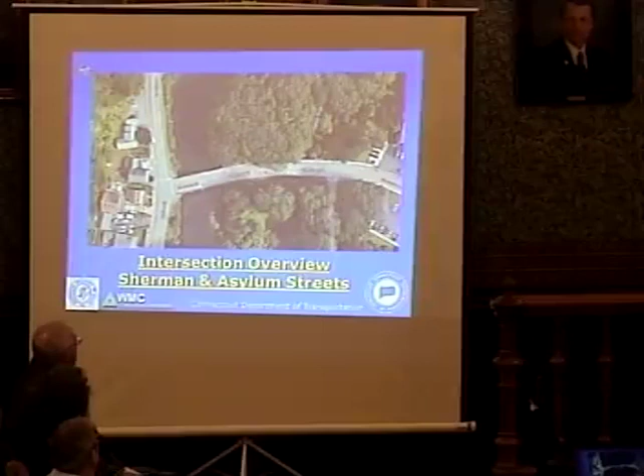So there's a couple other call-outs there - the Upper Falls Mill Dam, just so you can kind of get an idea where you are. It's a blow-up of the intersection. So we're really looking at these two bridges as a project and the associated roadway work.

Reasons for the project: the westernmost bridge, or Bridge 04047, was constructed in 1955. Later on, there was some reconstruction work in 1988. The superstructure condition was rated a poor condition, which is rated a 4. The substructure condition, which was a 6, is a satisfactory condition.

Bridge 03797, the Eastern Bridge, was constructed in 1920. It was reconstructed and widened in 1964, and there's been some recent repairs in 2017. The superstructure for that bridge is rated 3, or in serious condition. The substructure condition is 4, which is also poor condition. In 2017, the city did some superstructure repairs to that bridge.

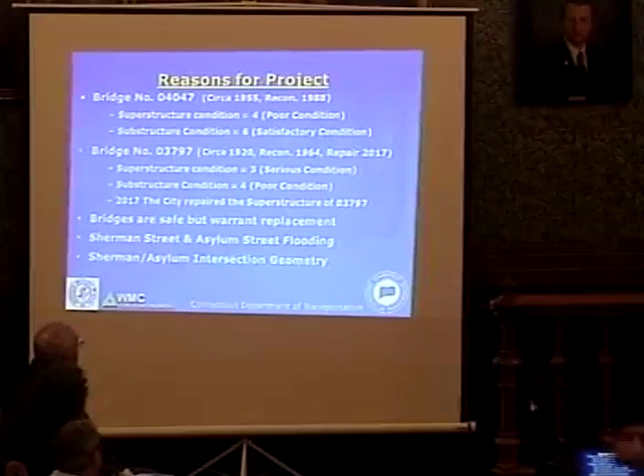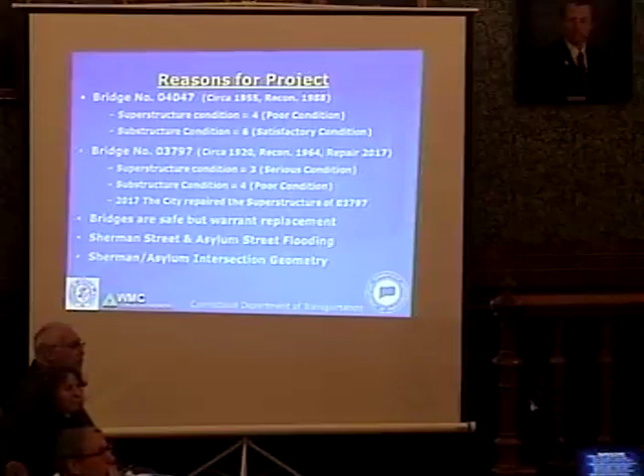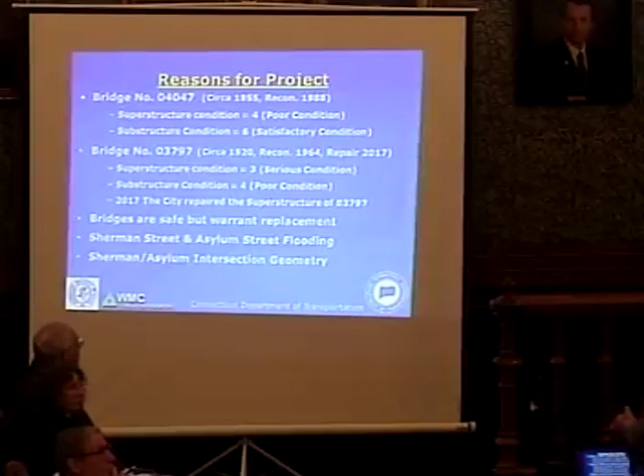Now, the numbers there - serious condition, poor condition - these are DOT ratings that they go through every 2 years. They inspect these bridges, so currently the bridges are still in a 2-year inspection cycle. As the bridges get worse, as those numbers go down, they get inspected 1 year, 6 months, so on and so forth. Currently they're still safe, but they will warrant replacement. So another reason for the project is we're really trying to reduce the flooding on Sherman and Asylum Street.

We're going to square off the Sherman and Asylum Street intersection geometry.

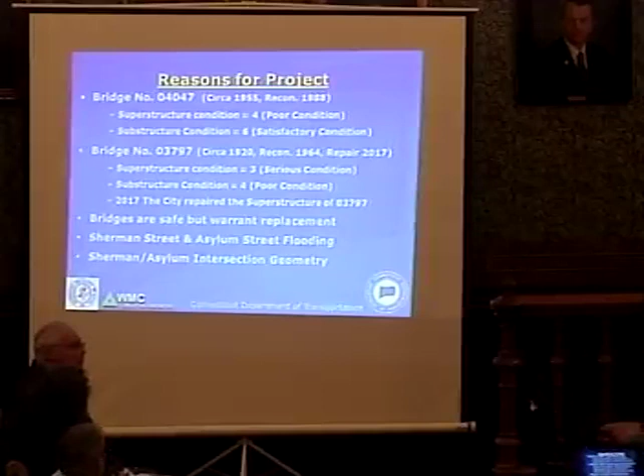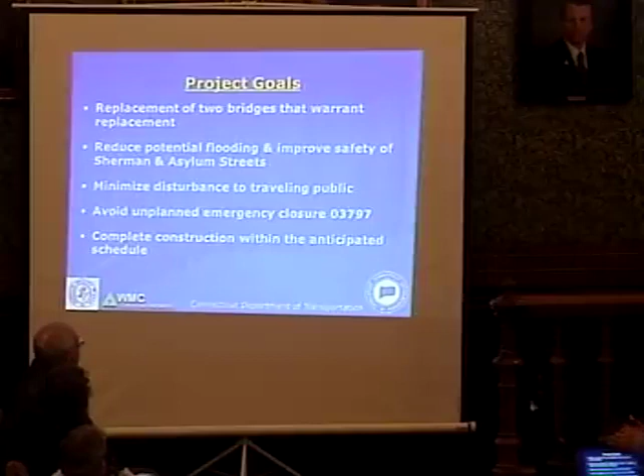Some of our project goals: replacement of the two bridges that warrant replacement, reducing potential flooding and improving safety at Sherman and Asylum Streets, minimizing disturbance to the traveling public, avoiding unplanned emergency closure of 03797, and completing construction within our anticipated schedule.

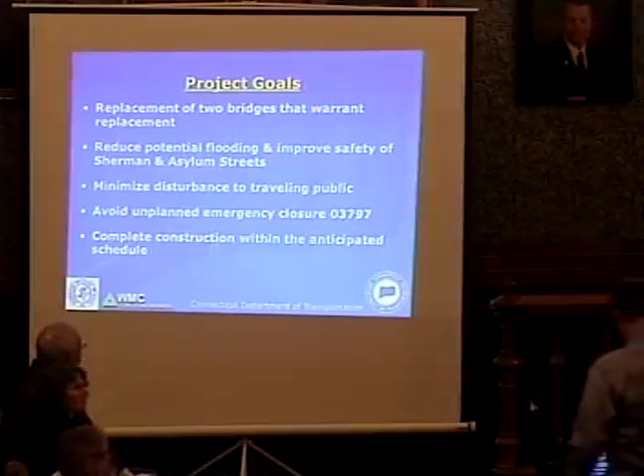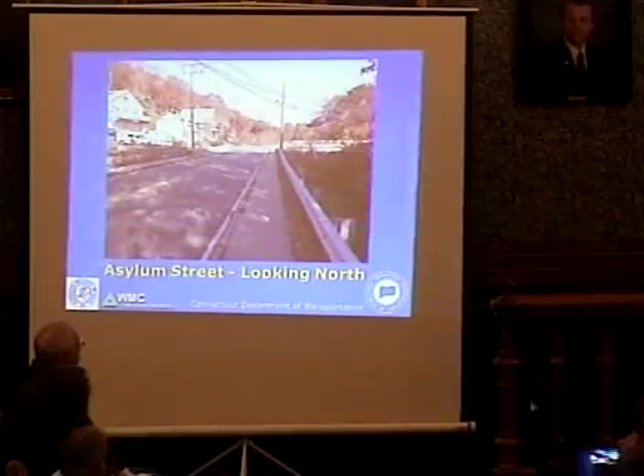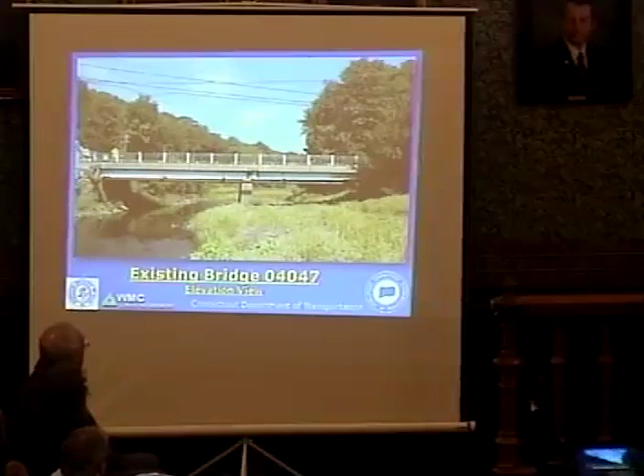Our overall project plan covers both projects on Sherman and Asylum Street, which is highlighted there in yellow. We're going to do a roadway reconstruction of about 1,030 feet, and we're going to be replacing both the eastern and western bridges.

The orange are actual structures. The green are areas where we're going to be filling in. And the light browny orange is actually areas we're going to be cutting.

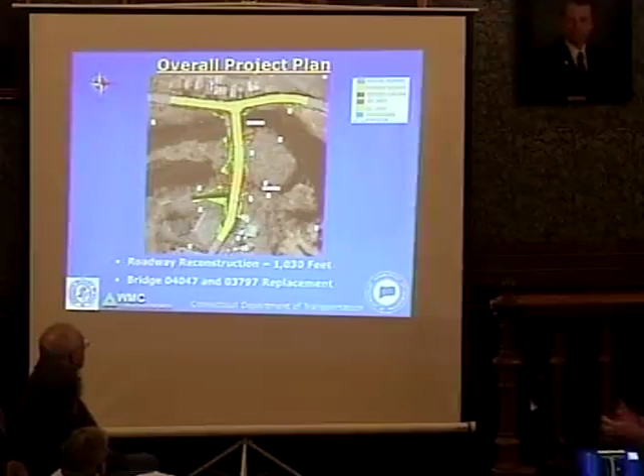On Asylum Street, there's approximately 525 feet of roadway reconstruction. We plan to raise the profile at the intersection by about 18 inches, at the intersection of Asylum and Sherman Street, and then taper down and connect into the existing roadway.

That raise in profile requires us to install a retaining wall along Asylum Street, or we're going to be filling in the river, and we don't want to fill in the river. We want to keep it open so the water can flow through.

Part of this project, we're going to be relocating all the utilities and the drainage on that road. There's a lot of utilities, very close to the existing bridge, and in order for us to get in there and construct the bridge, we'll need to relocate them.

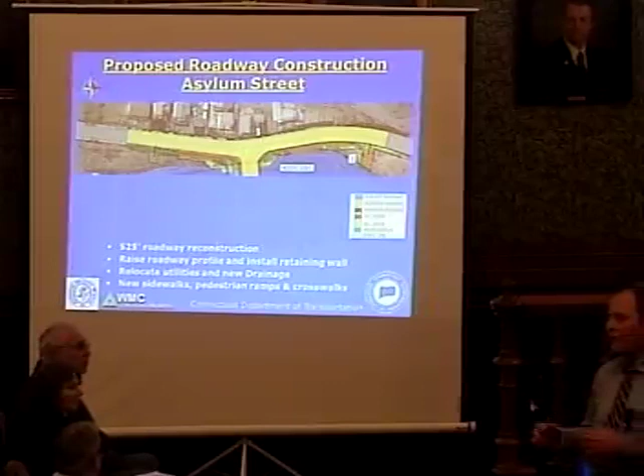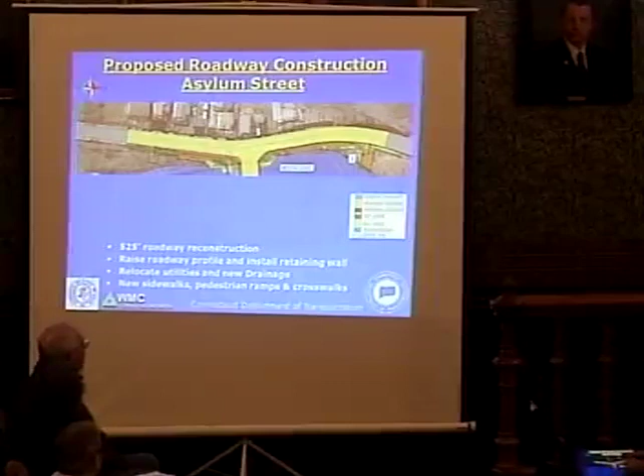So we're going to try to push them more to the west, to that western sidewalk, so the contractor can work on the bridge abutments and the retaining wall with less in the way. We're also going to be putting new sidewalks in, new pedestrian ramps, and new crosswalks as part of that project.

On Sherman Street, we're going to realign it slightly to the north. You can see to the left of the screen that little gray area, which is the existing bridge. We're going to square it, pretty much make a 90-degree intersection instead of having that skewed, hard right turn from Sherman Street that's very skewed.

We're going to be raising that profile to help reduce flooding. As that green area shows, those are the areas we're going to be filling in, so as we raise that profile, we'll have to grade out existing earth to make up for that difference. We're also going to be relocating and installing new drainage on Sherman Street, along with new sidewalks, pedestrian ramps, and crosswalks.

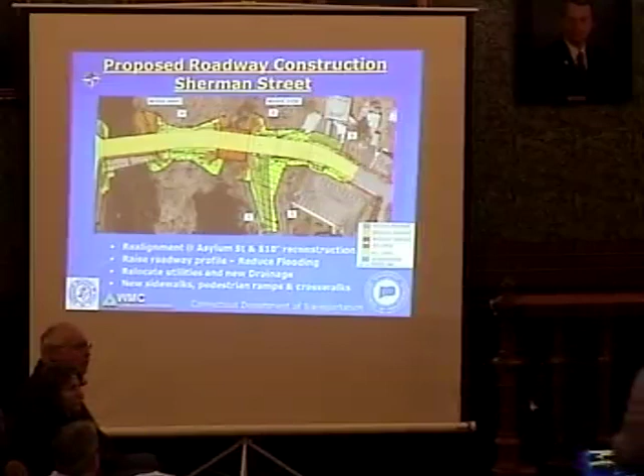Currently, the existing sidewalk is on the north side of the bridge, and then you come across Sherman Street to Asylum Street and have to cross the road. We're proposing to extend that sidewalk on the southern side past the park entrance down the southern side of the bridge and connect it to the sidewalk on Asylum Street.

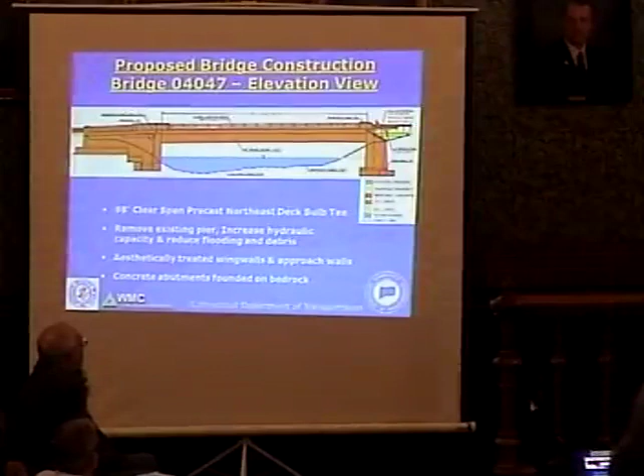This is an elevation view, similar to the picture, but this is a colored up view. We're going to install a 98-foot clear span with a precast northeast deck bulb tee, and remove the existing pier to increase the hydraulic capacity and reduce flooding and debris.

Our wing walls are all going to be aesthetically treated with a concrete form liner. At this time, the city is discussing using a natural stone-looking form liner, which mimics the look of real stacked stone. The concrete abutments will be founded on bedrock.

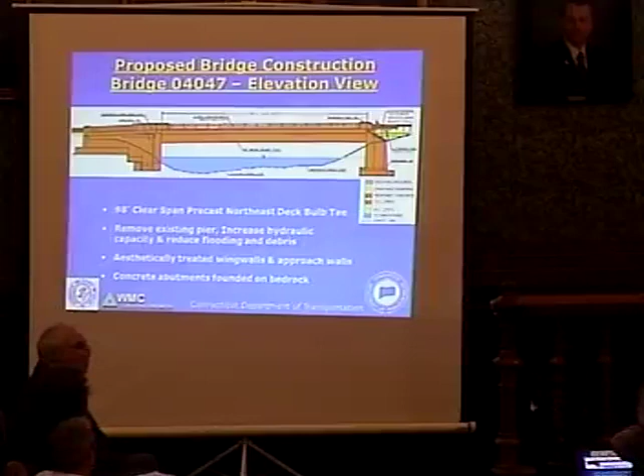Those beams that I was telling you about, the top portion of the beams are much wider than the lower portion. That kind of speeds up our construction time. We're able to install those, connect them together, and directly pave right on top of it, trying to keep this construction moving fast.

So we're going to widen the bridge. It's going to consist of two 12-foot travel lanes, two 4-foot shoulders, and a 5-foot concrete sidewalk.

Utilities are going to be relocated on the bridge. We're going to install a sewer pump station, pumping the sewer across the bridge so it's not hanging down below in the flood waters. We're going to tuck it up inside the bridge structure. We're also going to install a new water main and gas main on that structure, and install a new bridge rail on the bridge as well.

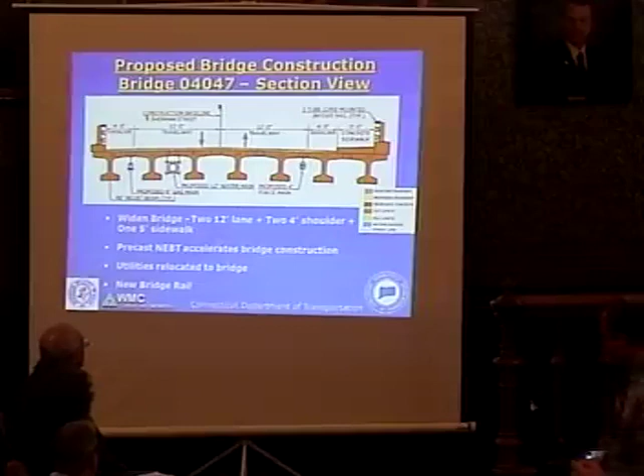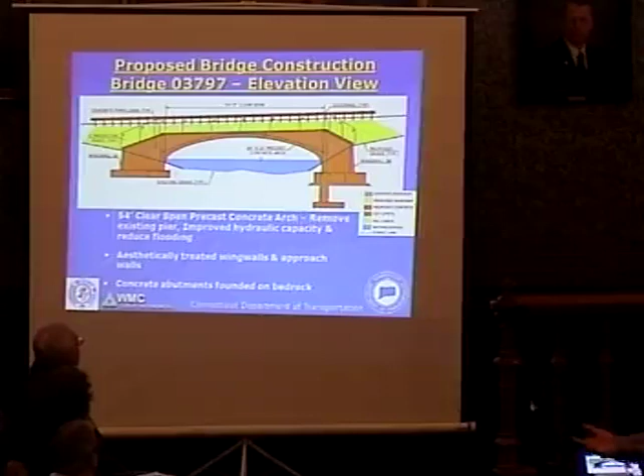The Eastern Bridge - this is an elevation view of the Eastern Bridge. This bridge, we're planning to do a 54-foot clear span precast concrete arch. We're going to remove the existing pier so we can improve the hydraulic capacity and reduce flooding. We also are going to treat this bridge with that form liner that I mentioned on the previous slide.

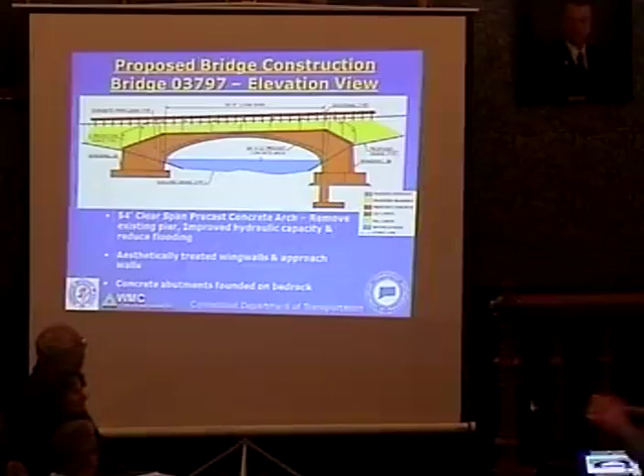Both the concrete abutments will be founded on bedrock. This bridge will have MBR guide rail because we're making this bridge a little longer than the other bridges, and we're going to slope the earth out on the side. So we're going to have a typical guide rail you'll see driving along the road. We're going to cross that bridge, and there'll be no bridge rail on this.

The cross section is very similar to the other one, but we're going to have the 12-foot travelway, the 4-foot shoulder, the 5-foot sidewalk, and then we're going to have the guide rail, and then we're going to slope down to the end of the culvert.

The bridge will be about 60 feet in length. We're going to relocate the utilities inside the earth above the box or arch culvert and below the pavement. So in that green area is where the utilities will pass through.

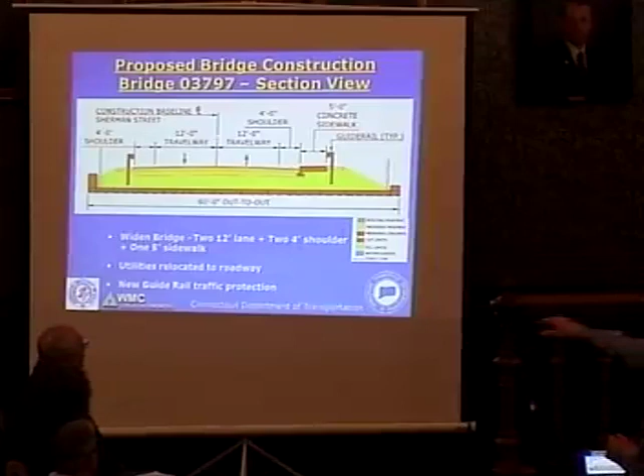This project is planned to be staged over 2 separate seasons. Our first season, we'd like to relocate the utilities in Asylum Street. Like I mentioned before, there's a lot of utilities out there, and we want to do the work we need to do to get them out of the way.

Also that first year, we want to install the easternmost bridge, the 03797, with that precast arch, and we want to complete portions of Sherman Street Roadway to allow traffic to be open to the public as soon as we complete the Eastern Bridge.

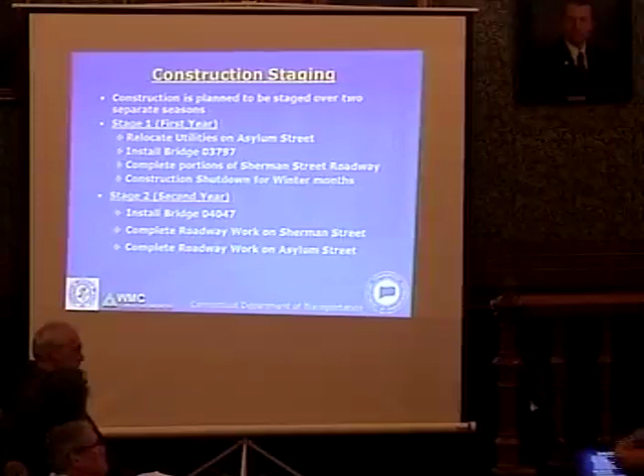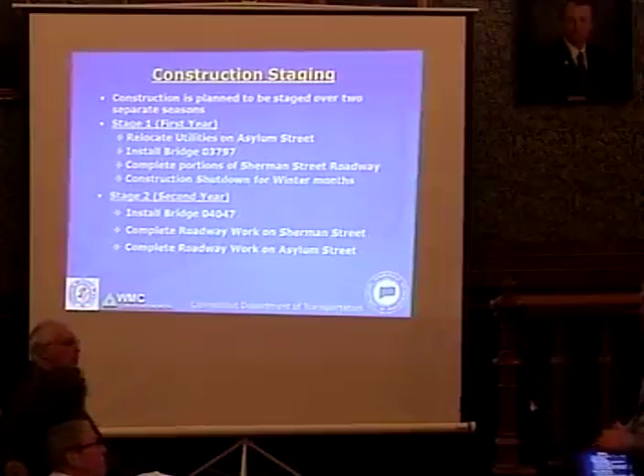Then after winter comes, we're going to shut down for the winter, open up everything, and then come back in the spring in our second year. That year, we plan to install the Western Bridge, 04047, complete all the work on Sherman Street, and then complete all the roadway work on Asylum.

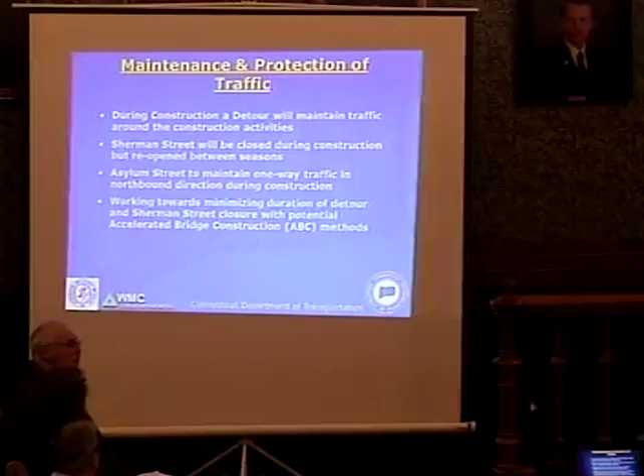Maintenance and protection of traffic: during construction, there will be a detour to maintain traffic around the construction activities. Sherman Street will be closed during construction, but reopened between the seasons. Asylum Street, we would like to maintain one-way traffic in the northbound direction during construction. We're working towards minimizing the duration of the detour and Sherman Street closure with potential accelerated bridge construction methods.

As mentioned before, we talked about the bulb T with the beam being wider at the top, and the precast arch - those are some of the things that we're doing. We're also going to look at more methods to decrease the amount of time the bridge will be detoured.

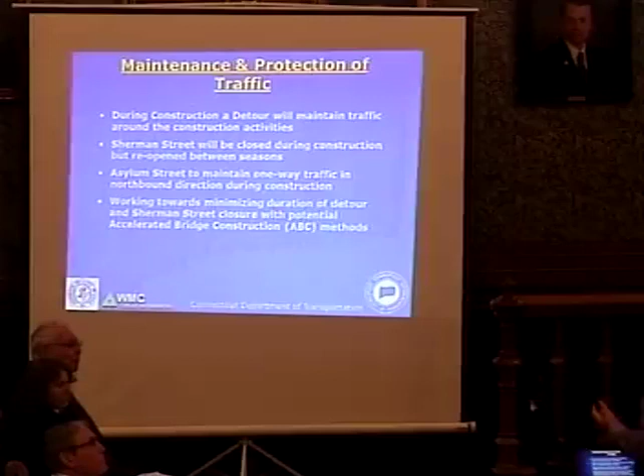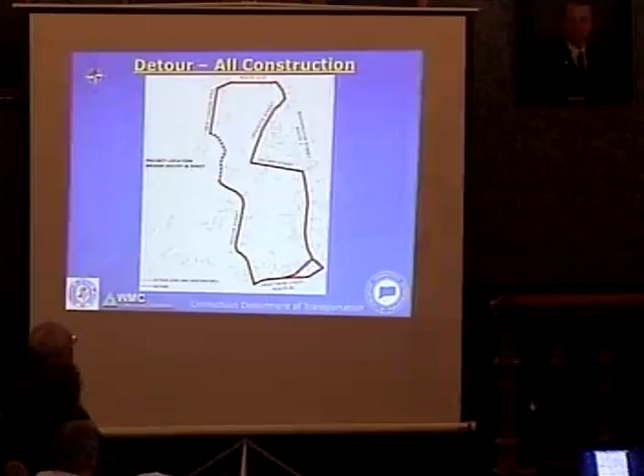The gas will be temporarily capped during construction, reinstalled by the winter time, and then capped again in the next spring to complete the work.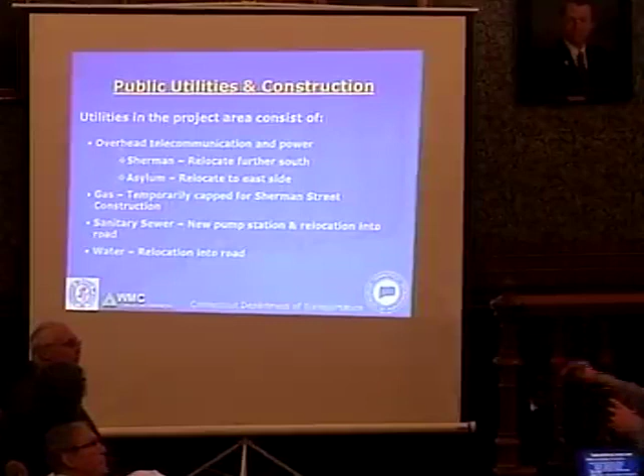As I mentioned earlier, we're planning to put a new pump station and relocate it into the road. We want the new pump station to let it feed by gravity down to this pump station, and then we're going to pump it over the bridge so that pipe I showed you earlier on that elevation view is not hanging in the water. It's going to be tucked up under the bridge. We're also going to relocate the water main into the road.

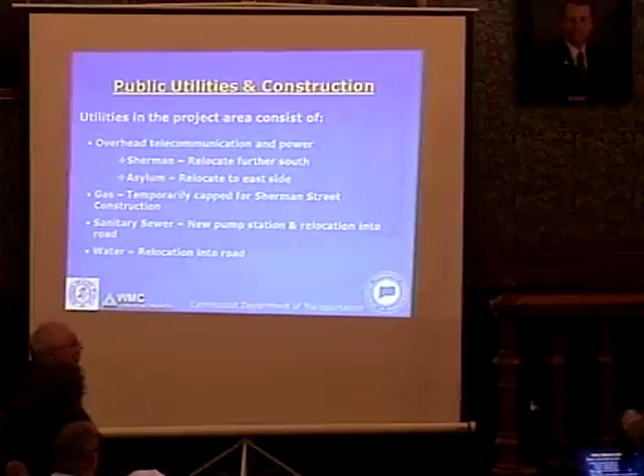Some of the environmental considerations: we want to limit our inland wetland impacts during the bridge and retaining wall construction. We're going to use temporary cofferdams to handle the water and confine construction work.

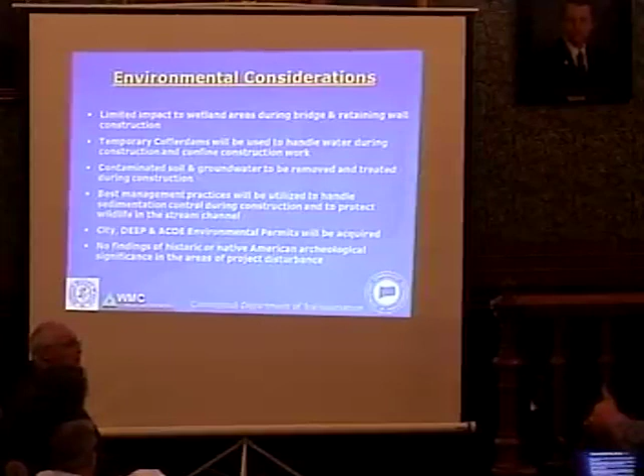Contaminated soil and groundwater will be removed and treated during construction. Some of that material out there is known to be contaminated. The level of contamination, if it's too bad, is going to be shipped off and treated properly.

Best management practices, such as silt fence and hay bales. You might not know what best management practices are, but they're things that we can do to keep siltation out of the river and help protect the environment. So we plan on implementing a lot of those best management practices during construction.

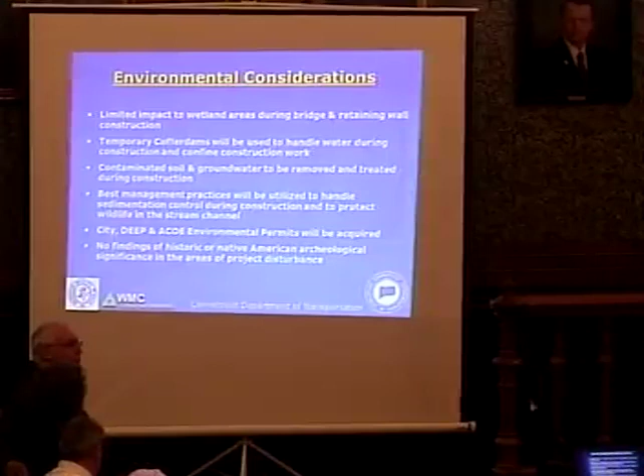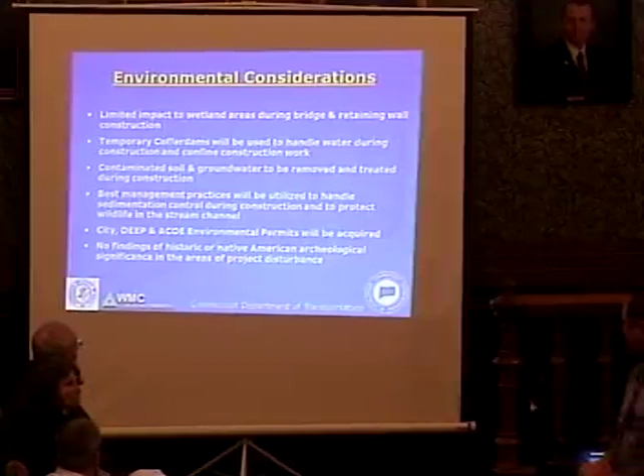We will be required to get city, DEEP, and Army Corps environmental permits as part of this project. We had an archaeological study performed, and at this time there are no findings of historic or Native American significance in the area.

Rights of way. As part of this project, rights, easements, and minor acquisitions will be required based on our preliminary design plans. They are preliminary and subject to change. Right now we do have some plans here, so if you are a property owner and you'd like to come up and see what kind of work's going to be done around your property, feel free to talk to me after the presentation.

Dennis McDonald is a project coordinator from the Department of Transportation. He'll be here to explain some of the right-of-way process for you.

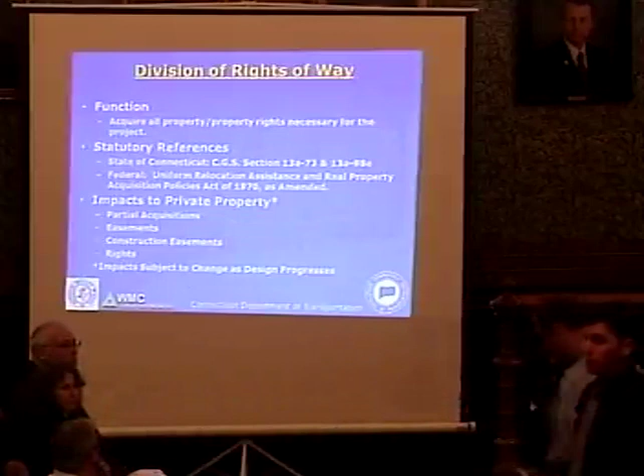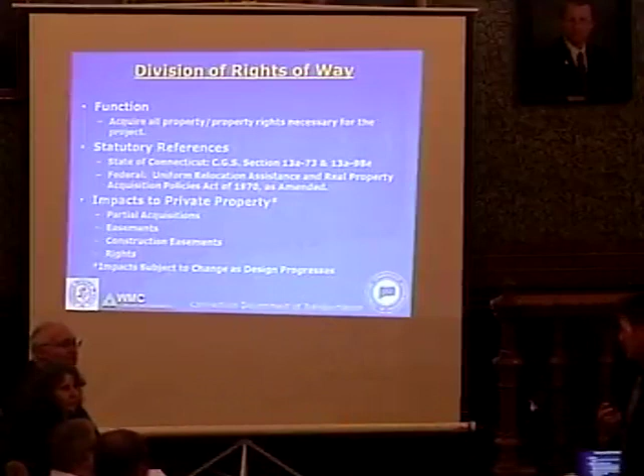Good evening, everyone. My name is Dennis McDonald. I'm a representative from the Connecticut Department of Transportation, Division of Rights-of-Way. I'm just here tonight to briefly speak and explain a little bit about the rights-of-way process.

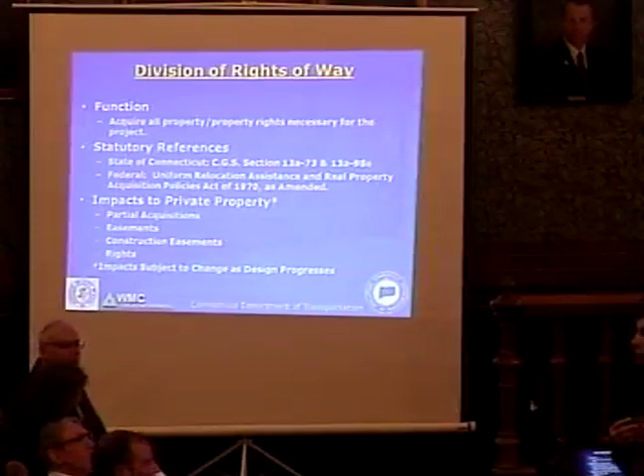Essentially, the function of the Division of Rights-of-Way is to acquire all property and property rights necessary for the project. This is done in accordance with Connecticut General Statute Section 13a-73, 13a-98e, and the Uniform Relocation Assistance and Real Property Acquisition Policies Act of 1970 as amended.

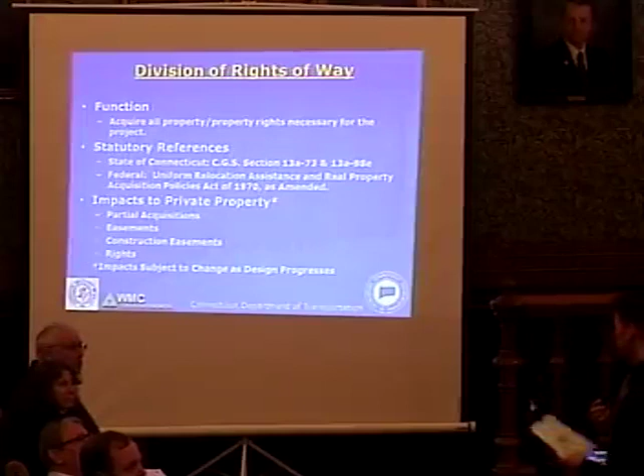As John just explained, right now we're looking at some partial acquisitions, easements, and construction easements and rights. This is subject to change as the design progresses, but it gives a general idea of what we're looking at.

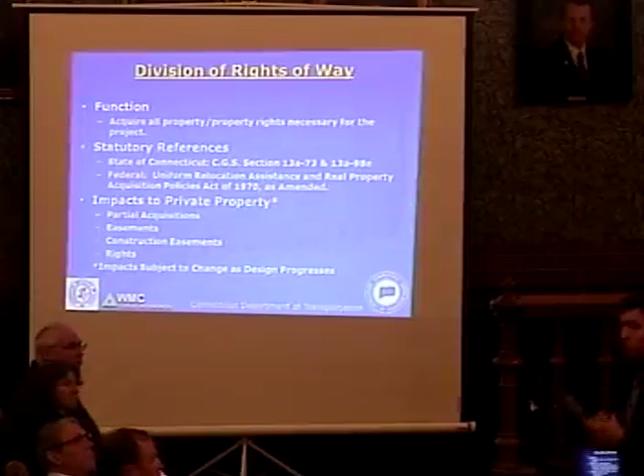The right-of-way process: once property impacts have been determined, each impacted property owner will receive a letter of intent to acquire. This essentially initiates the right-of-way process and provides a little explanation of how the process works.

Soon after the letter is received, a valuation process will take place, and once a value has been established, a written offer of compensation will be made to each impacted property owner. The offer comes in the form of a letter and provides a detailed breakdown of the specific property impacts and the dollar value associated with each impact.

Property owners will be given time to consider the offer and negotiate should they wish. If an agreement is reached, an acceptance document is signed, and a closing will take place approximately 30 to 90 days later. If an agreement cannot be reached for whatever reason, the state will utilize its power of eminent domain and acquire through the condemnation process.

Now, I understand this does have a very negative connotation, but many times this is done to keep a project on schedule. If the state does elect to pursue eminent domain, the original offer is deposited in the court system, available for withdrawal at any time, and property owners can continue negotiations or file a formal appeal for a reassessment of damages through the court system.

If the property owner elects to file a formal appeal, it must be done within 6 months from the date the state files for eminent domain. And that's essentially the right-of-way process in a nutshell.

If anyone has any questions, I'd be happy to answer them at the conclusion of the presentation. I also have with me tonight a question and answer brochure if anyone would like a copy. I'll turn it back over to John now. Thank you, Dennis.

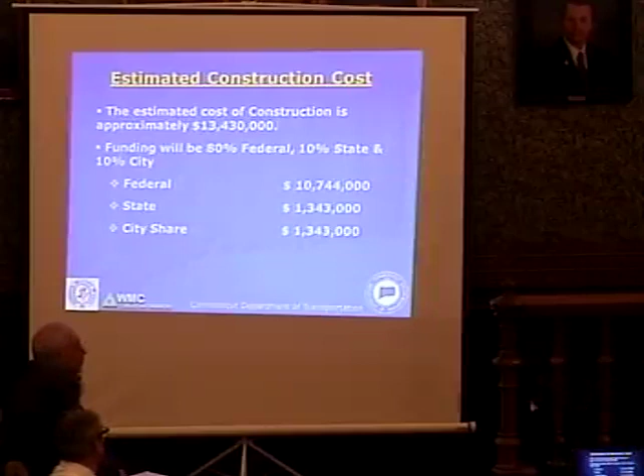The state and the town is about $1.35 million. The project schedule: currently, we're in the design process. The plan at this time is to start construction in the spring of 2022 and complete the project in the fall of 2023, for a total duration of about 20 months. The schedule is preliminary and predicated upon the availability of funding, permits, and rights-of-way acquisition.

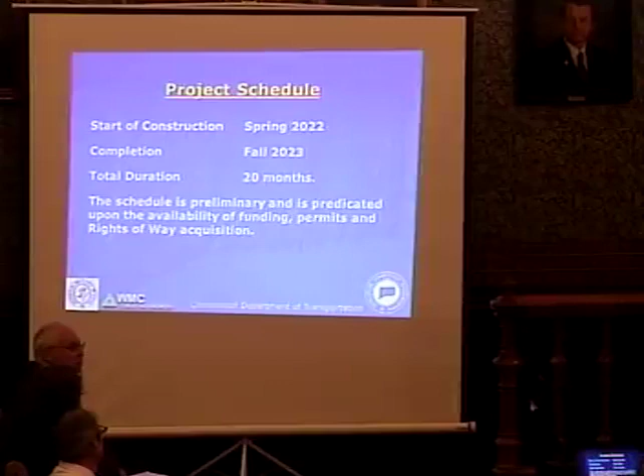This whole presentation will be on the City of Norwich's website, so you'll be able to access this to get any of that contact information, review any of the plans, go over the presentation in the comfort of your home. Also, Mr. Brian Atwick, he's from the Department of Transportation, he'll be the project manager and coordinator for the district, for the DOT. Thank you. I'd like to take any questions and answers at this time.

Yes, sir. When the project is done, when the bridge comes out onto Salem Street, Sherman comes out onto Salem Street, will that be cut square, or will the corners be rounded? Corners will be rounded. Will tractor trailers be allowed to use it? It's very tight there. It's going to be very limited, because it is so tight.

Yeah, the last time a tractor trailer used it, it took down guardrails. And every time a tractor trailer takes down guardrails, they run. I know because I was a truck driver. They run, and the city pays for it.